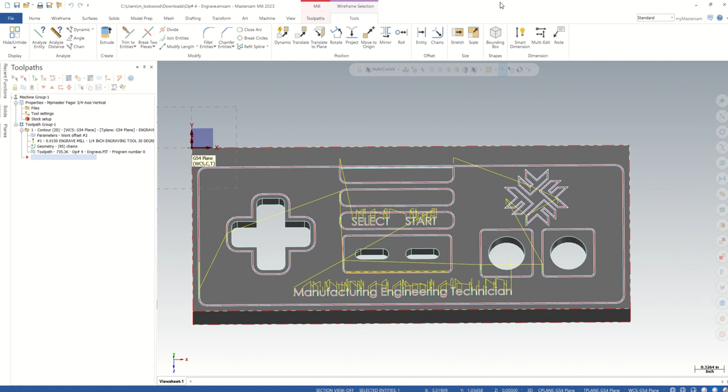Right off the get-go, I already have this program fully made. So if you are fine with just doing the base of what I just shown you, you can actually download this Op 4 PIT file. I'll open this up really quick so you can see. This is all available to you on FOL. If you want to download it, you can. Here's the entire program, and it will basically engrave everything that you have just seen. So a couple things that you need to pay attention to.

Number one is that your datum location - your X0 is on the left-hand side, your Y0 will be on the fixed jaw of your part, your Z0 is going to be on the top surface. You're going to be using a 30-degree engraving tool, and another big one is you're going to be using the G55 work offset. So again, this program is already written, you just need to make sure that you set it up in these regards and all will be good.

Now, a couple students - I've talked to a few people - said that they want to engrave their initials on top of the surface as well, and that's totally cool. I'm going to walk you through that process.

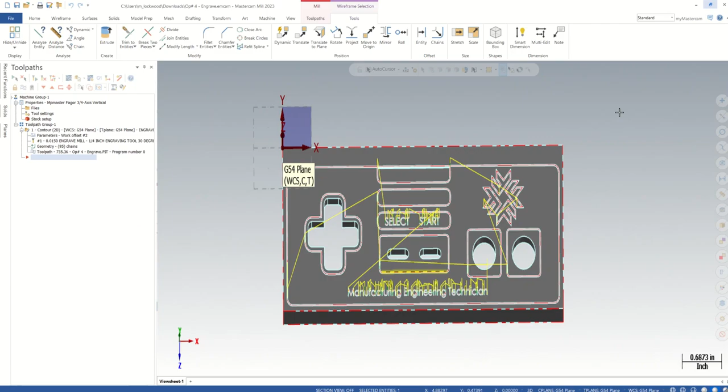So do me a favor, I actually have the Mastercam file here. If you just want to open this up and download it, give it a few seconds to open. Obviously, you're going to need to do this on a computer that has Mastercam on it. Realistically, I would suggest doing this on one of the computers in the B1016 CNC lab.

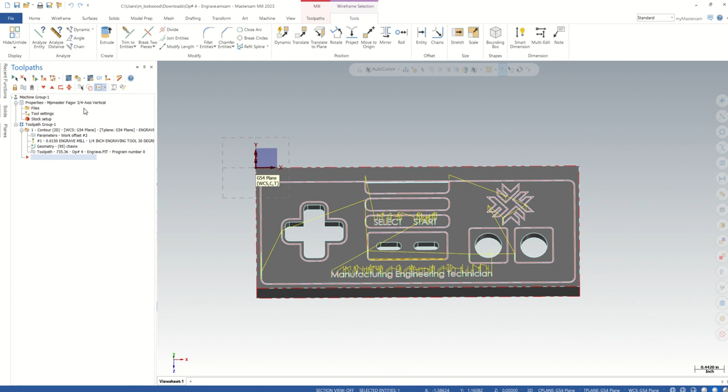The reason for that is because if you look over here in properties, we need to make sure that our file is going to post using Fagor word programming. The default will just be with Fanuc. So we need to make sure that we are actually using a computer that has the Fagor post processor on it. I have posted this file as Fagor, but again, when we post our actual code, we will need to make sure that it is done using the Fagor word language, okay?

So again, right now when I look at this file, you can see I've got all my tool paths. These yellow lines just kind of represent my tool motions as it moves around the part to engrave the top surface of my workpiece. If you would like to engrave the top surface of your part, what I'm going to suggest is that maybe if you want to put your name or your initials up here, that's more than fine.

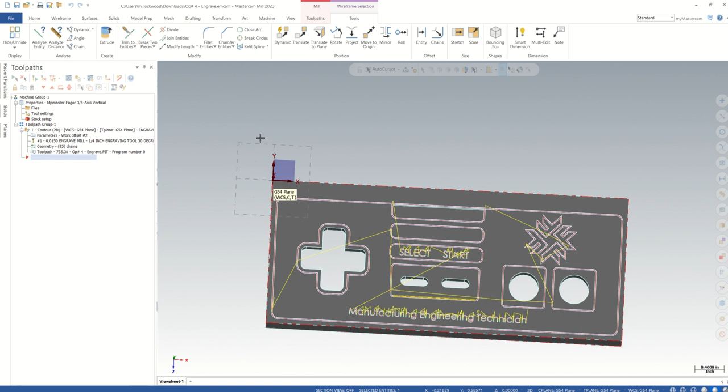In order to do that, what you're going to do - and I realize that you've never used this software before, so again, I'm going to try to do this as quickly as possible. I don't want this to be a 40-minute video, but at the same time, I want to take enough time so that you know what I'm going to be doing.

So what I want to do is at the very top here, I'm going to go to this wireframe tab, and all I'm going to do is go over here to the shapes group and click create letters. Now the letters that you want to create, just use the OLF simple, and the reason for that is because these are basically just stick letters, and it's the easiest ones to select for when we are engraving. We don't want to go into too fancy a font, or the tool is going to want to try to go on both sides of it.

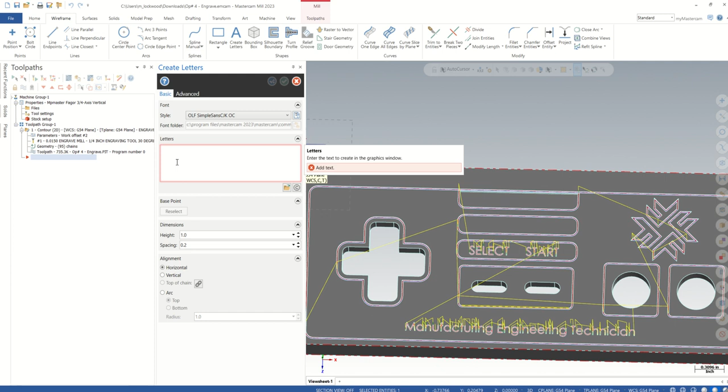It just becomes a nightmare. Realistically, what we want to do is type in what we want for our letters. So I'm just going to type in M. Lockwood, because that's my name. You can put your name in there if you want, or your initials, or a gamer tag — you can do whatever you want.

Now, you can see that Mastercam has generated this lettering by default, and it is massive — bigger than the actual NES controller itself. So we need to reduce that right down.

What I'd suggest is in the height area, come here and click, highlight this text, and change this to 80 thou, so 0.08 of an inch.

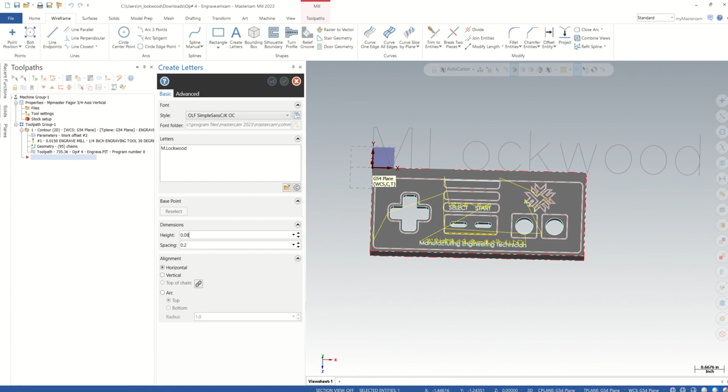You're going to see that it looks like my font has disappeared, but it's not — it's actually anchored to the bottom left-hand side of my cursor.

The other thing I'm going to do is change my spacing to 30 thou. This gives our tool a lot of movement between these letters so it doesn't look all smushed together.

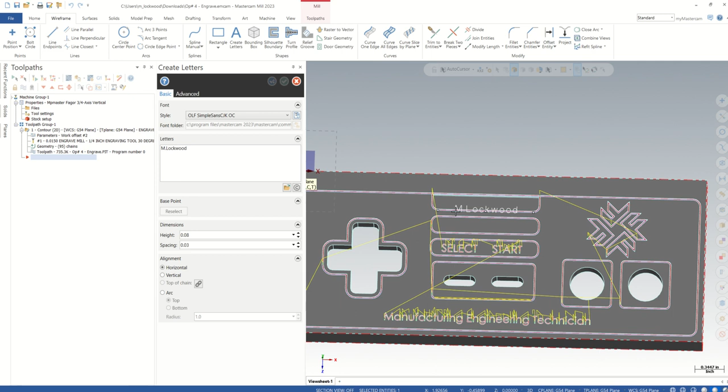I find that's a pretty decent amount. If you want, you can play around with the spacing and the height a little bit to get whatever you want. And because all of our letters are going to be a bit different, I can't guarantee you're going to have 8 or 9 letters like I have.

So I can't really give you an exact position to locate it. All I'd do is eyeball where you want to put this, and you're just going to click right on top of your surface.

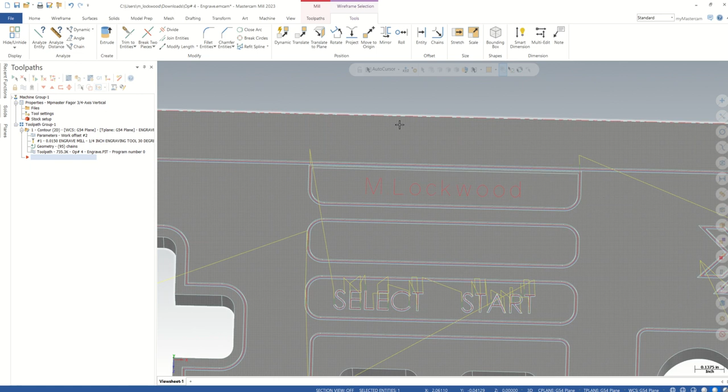You'll see that my lettering has become this blue cyan color, and all I'm going to do now is click this green check mark to say OK. You'll see that the lettering has now been added onto the top surface of my NES controller.

Now, the next thing I need to do is — I have all of my toolpaths generated, so that's all my feed rates, RPMs, all my locations already programmed for the lettering and engraving currently happening. What we need to do is add the letters I've just added onto my NES controller into that toolpath, so you're not setting RPMs, feed rates, depths of cuts and all that stuff. We can just use what I've already created.

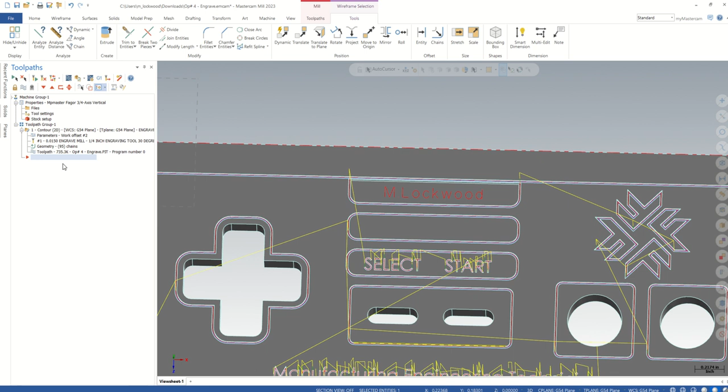So what we're going to do is go to where it says geometry over here, and just click on that one time. You're going to see that I have all of these chains — right now I have 95 chains. Basically every single one represents all the different letters and features that we are engraving. We need to add our lettering chains to this.

So you want to come over here into the chaining manager, right click one time, and go to add. Do me a favor, don't be deleting chains out of here, or you're not going to have a good time — your part's not going to look correct. So make sure that's a right click, and then like I said, go to add.

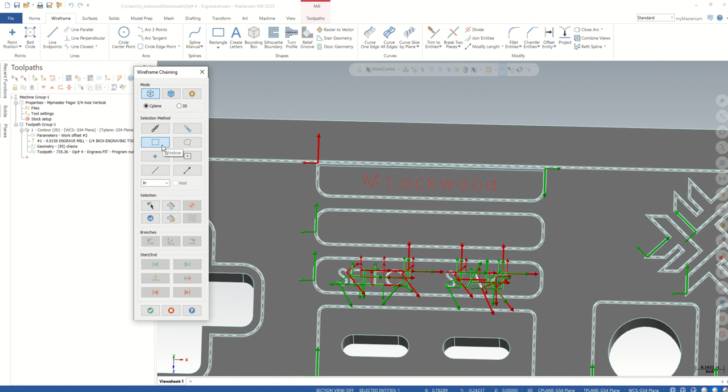From add, we're going to get our wireframe chaining dialog box. What you want to do is, number one, make sure you are in the wireframe method. You also want to make sure you're in C-plane, and I find it's easiest to do this with a window selection method, so make sure you have all selected, okay?

The next thing we're going to do is come in and draw a window around the lettering that we've added. So I'm just going to click and drag. You need to make sure all of your lettering is fully encapsulated within this window — if it is not 100% surrounded by the box we've drawn, Mastercam will not select it.

Even if this was 90% selected, Mastercam's going to say nope, unless it's fully surrounded by this window, it will not select.

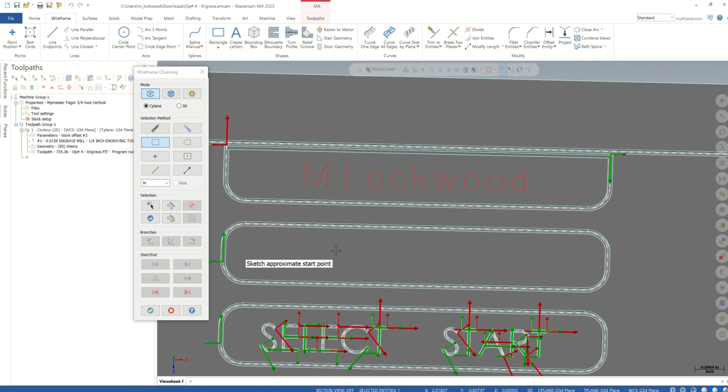So what I'm going to do is click and say, okay, here's my window that I want to create my geometry. Mastercam is asking me, sketch approximate start point. So realistically it's just saying where do you want to start on this lettering. I'm going to kind of start over here on the left-hand side.

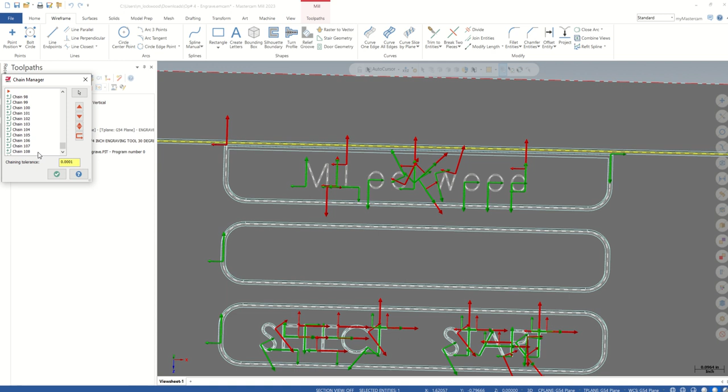I'm just going to randomly click right here, and you'll see that Mastercam has now grabbed and selected all of these letters. It's actually adding 14 additional chains onto this toolpath. When I have that, I'm going to click OK. You're going to see that now I no longer have 95 chains, I now have 108, and I'm going to click OK one more time.

At this point in time, Mastercam is updated. It realizes I have new chains that we want to engrave. If you look over here, you'll see we have these red X's. These red X's show us that we've made modifications to a pre-existing toolpath, and Mastercam isn't fully updated yet.

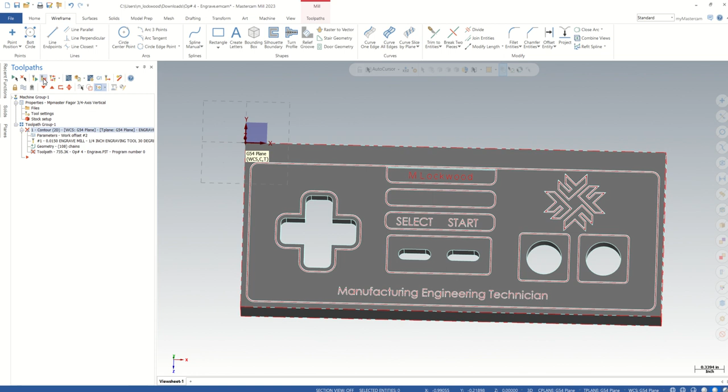So what I'm going to do is click on this icon here, which is regenerate all dirty operations. It shows a tool with an X on it, and just because there's an X doesn't mean it's a bad feature or that it's going to delete. That's not the case. I'm going to select this, and you'll see that Mastercam has now added these letters onto that chaining toolpath. So it's added my initials to the engraving operation.

The next thing I want to do, and if you choose to it's fine, you don't technically have to. You could post your code right now, but I personally always like to verify that what I've done is correct. So the next feature I'll select here is the verify selected operations icon, like a yellow piece of material with a little clipboard and a check mark in it. It's very tiny to see, but I'm going to select it.

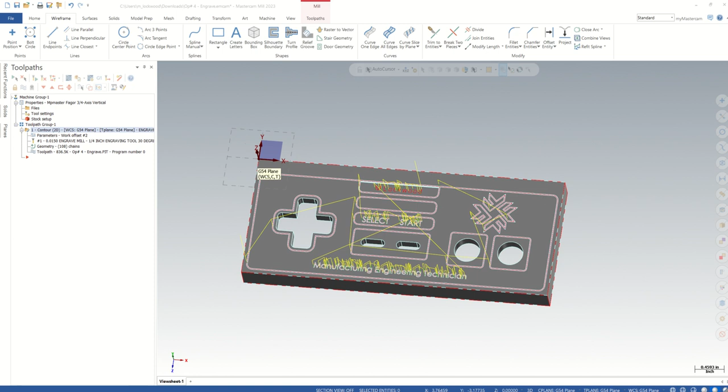What it's going to do is open up another screen where it will actually show what my toolpath is going to look like as my tool moves around engraving the top surface of my profile. So what I'm going to do again is press play, and you'll see that it's showing my tool moving around.

Obviously this is not a real-time speed, it's going to take much longer than that. But the thing I'm looking for is just that, okay cool, it did in fact engrave my initials in the top surface of my workpiece. So I'm going to exit out of this.

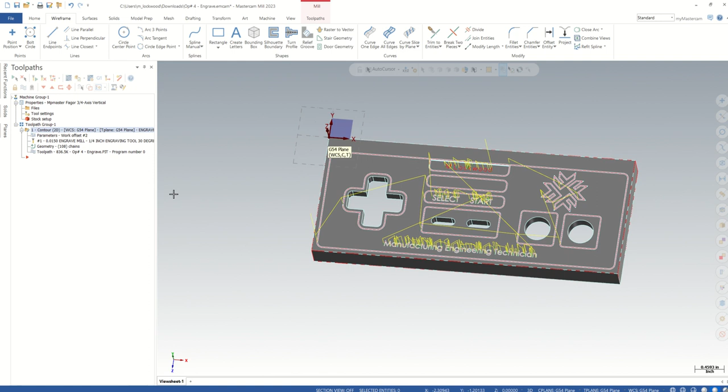Now the next thing that I would do, and again you can save this file at this point in time, that's fine, especially if you've done it on any other computer that's not within the B1016 CNC lab. If you are in the B1016 CNC lab, what you're going to do is click this G1 button.

This G1 button is basically the post processor, and what it will do is actually create your G-code program for you. As you can see, because we're in Fagor, it will already give you the .pit file extension, and what you can do is click OK.

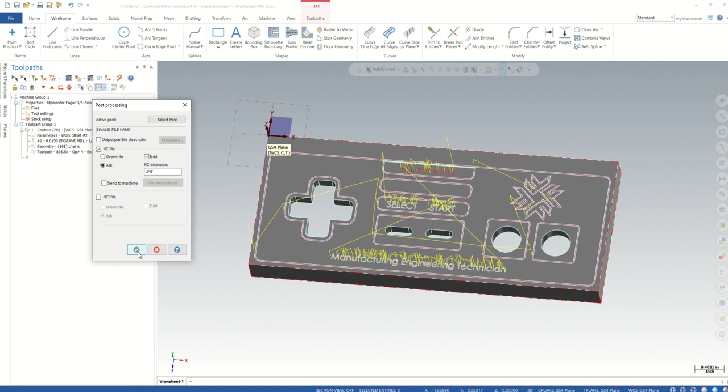Now, as you can see, I am doing this on a computer that does not have the Fagor post processor, so I won't be able to post code, but realistically you should be able to click OK, and then save this as a 6-digit number file name, and then essentially load this program onto our machines in the B1016 CNC lab and engrave the top of your workpiece with your initials on that top surface.

So that's basically it for this video. If you have any questions or concerns, feel free to reach out to me.